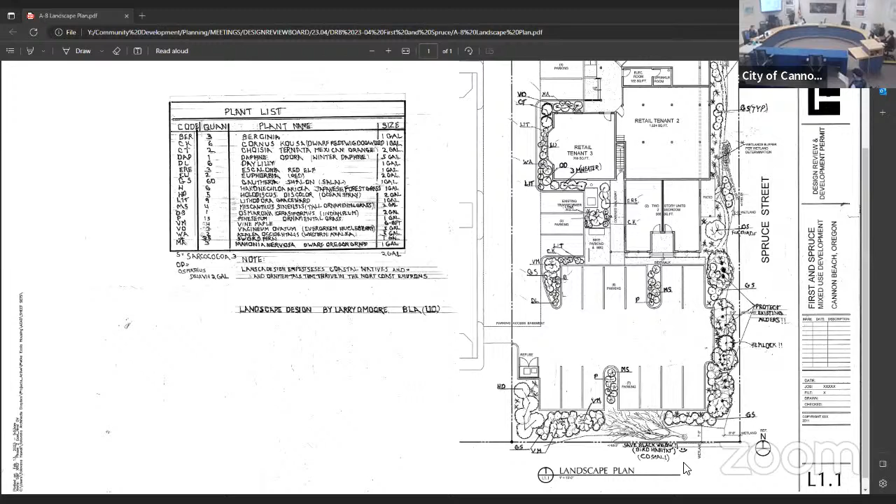May I ask a question? Of course.

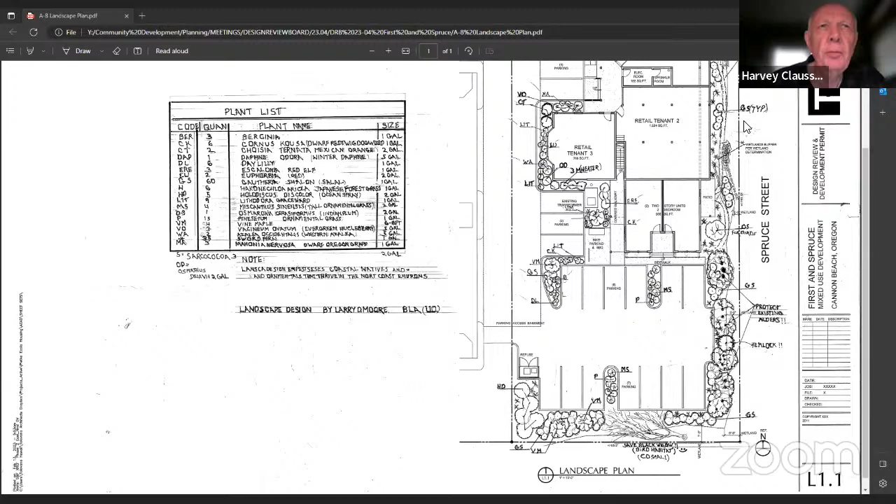Are we saying that Todd Prager Associates' plan for removal and retention of trees no longer applies, and that Larry Moore's landscape design is the current design presented with the application? That's my understanding, Harvey. So why do we even have Todd Prager's plan attached? That looked like a pretty good plan.

I can address that. This is a similar footprint project presented by the same applicant for the same property. We felt it was appropriate to recycle that plan for purposes of review. If there was a necessity to remove trees, we would go through the standard tree permitting process, which requires review by the city arborist before any permit to remove trees is issued.

Well, it certainly looks like you're going to have to remove a lot of trees. Would the applicant be willing, I mean, I thought Prager did a great job trying to retain trees. Would he be someone who could be involved again in making sure the trees are retained, or the ones that need to be removed, or is that up to the applicant or the city to determine who is part of that process?

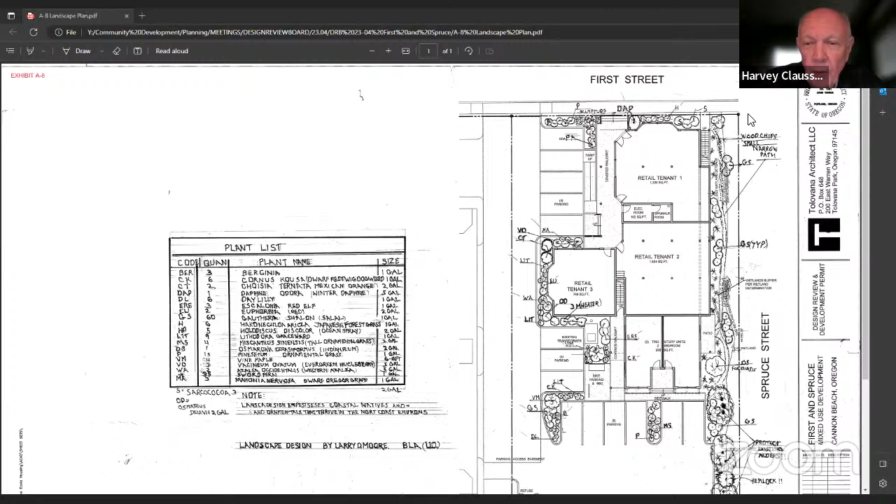I think that would be a question for the applicant. I would think we could make that arrangement, yes. It just, the former structure might have been the same footprint, but it can't possibly have covered the same area of the lot and be able to retain the trees that Prager was showing. Right, it's going to be impossible.

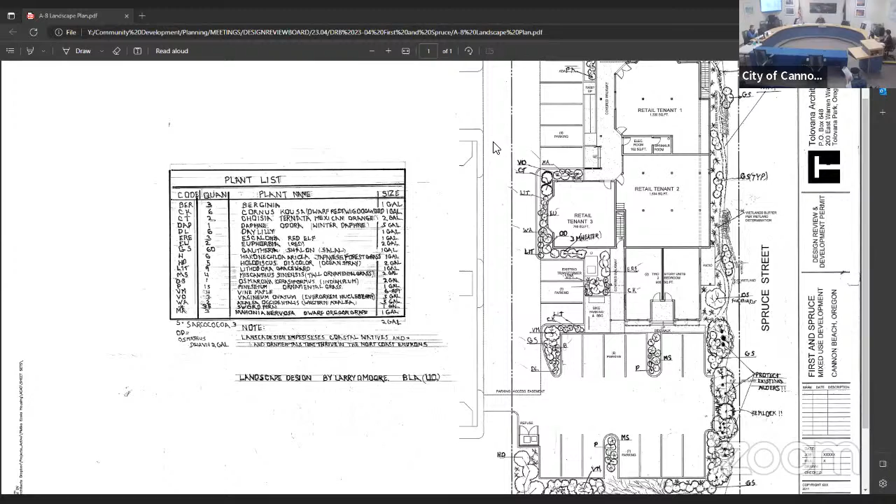I have a question about the parking. Is the number of spaces shown the minimum requirement for this building? Correct, that does meet the parking requirements. There is one parking space per 400 square feet of retail. And because the residential space is less than 50% of the building, there would be one parking space per residential unit instead of the required two.

The applicant does have off-site parking as well, so I believe one, possibly two spaces would be addressed through their off-site parking allocation. So there's not really any chance to eliminate parking spaces. Correct. Thank you.

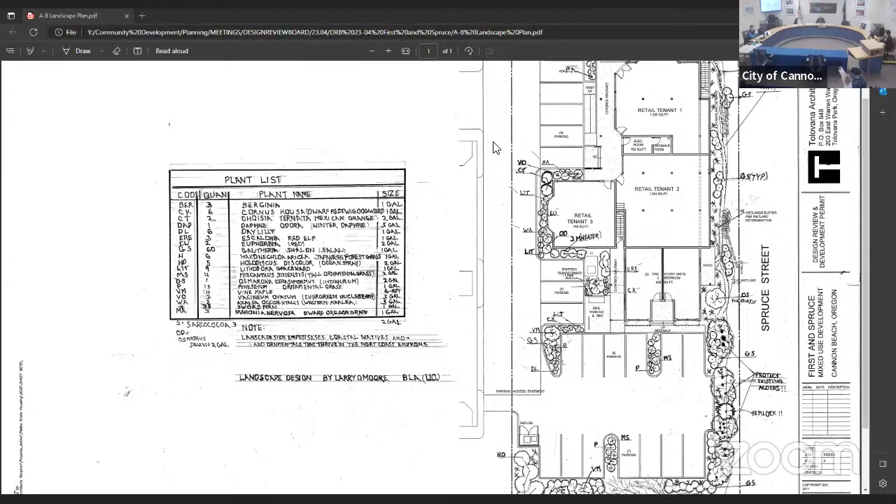Okay, so where are we at? Well, I have a question I'm confused about, regarding the fact that we are reviewing a C1 limited commercial zone, which according to section 17.22.050 standards, states the maximum building height is 24 feet, unless. But we've got 28 feet listed, and that's a C2 zone, so I'm confused.

To address that, it's 24 feet unless it has a peaked roof of 5:12 pitch or greater, in which case it can be 28 feet. Okay, and you can confirm that, David, that it is the pitch roof? Yes, absolutely, I designed it to exactly that criteria. Okay.

And then as far as freestanding signs, there's no plans for that. A lot of what you'd call malls have freestanding signs, but there's no plan to call it Ecola Square East or something similar to landmark it, and then the businesses can add their own business name?

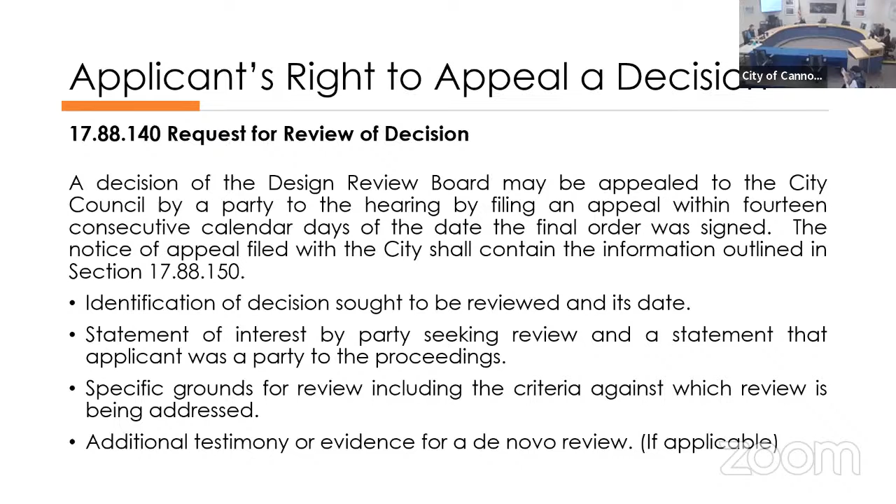This will discuss a little bit about the appeal and subsequent events. The city did appeal the decision made by the Design Review Board earlier this year, based on the provisions of 17.88.140, where a decision by the Design Review Board may be appealed to City Council by a party to the hearing by filing an appeal within 14 consecutive days of the date the final order was signed. The required information for an appeal includes identification of the decision, statement of interest, specific grounds for review, and additional testimony for review. The outcome of that appeal was that the City Council overturned the original decision of file DRB 23-01 and approved the plans submitted with that application.

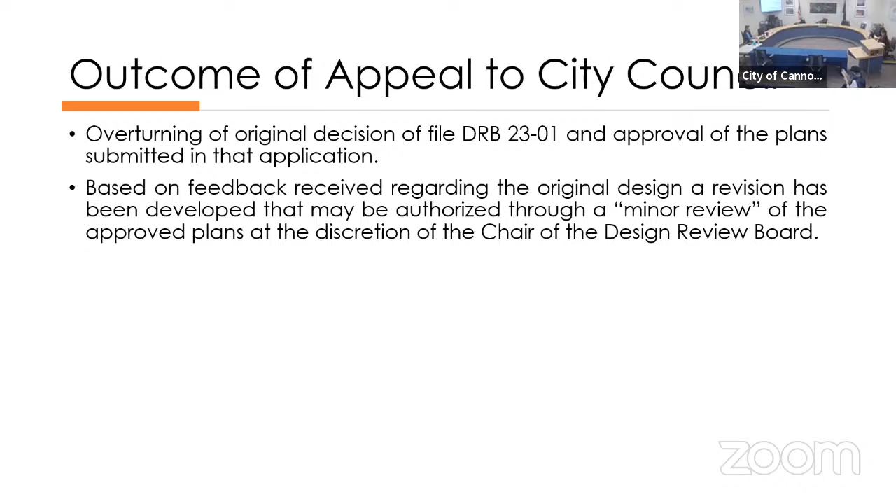Based on feedback received regarding the originally submitted design, a revision has been developed that may be authorized through a minor review of the approved plans at the discretion of the chair of the Design Review Board. A minor review is a revision of approved plans that includes construction documents and shall conform to all aspects of the approved design review plan where circumstances unknown or unforeseen at the time plans were approved make it undesirable or unfeasible to comply with some particular aspect of the approved plan.

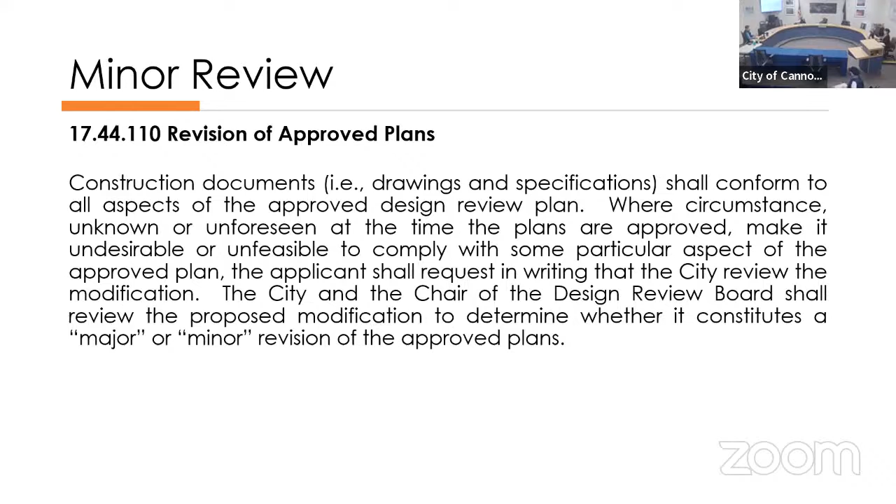The applicant shall request in writing that the city review the modification. Whoever is sitting in the chair of the Design Review Board shall review the proposed modification to determine whether it constitutes a major or minor revision of the approved plans.

Minor modifications are those which result in an insignificant change to the approved plan. Examples include limited dimensional or locational changes to building elements such as windows or doors, changes in building materials where only a limited area is affected, and substitution of landscape materials which do not affect the overall landscape design. If the city determines the proposed change is a minor modification, it will proceed with a review of construction documents or changes in construction.

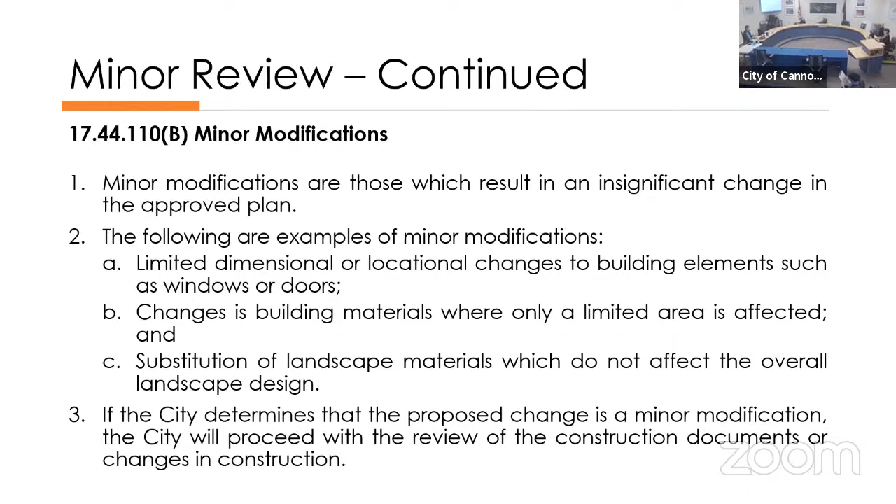This does include the addition of a new door on the eastern elevation of the structure. All other aspects would be unchanged. As the city council approved the original plans, the only change would be the addition of this door. The city has requested a minor review of this revision. We have requested that, which is why we're having this meeting tonight. It's our opinion that this is a minor revision because it's only the addition of a doorway, not a significant change.

As stated during the January meeting, the interior is not subject to review. The question is whether the footprint is the same as in the original design, total footprint? Correct, the footprint is the same. My understanding is they shrank and rearranged the bathroom configuration, shrinking the men's bathroom down a little bit in order to accommodate the family-friendly restroom.

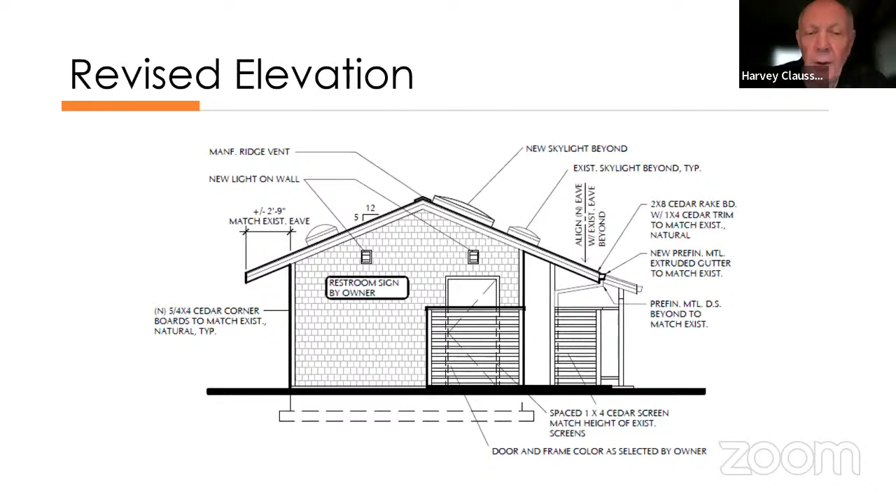At least they did insist on a family restroom. I think we gained quite a bit with that addition. I would agree. I don't know that Michelle was, but yeah, I agree too. I would note that they also added a foot washing station. Yes, yep. And there's a place to add lockers at some future date, should that happen or be considered practical.

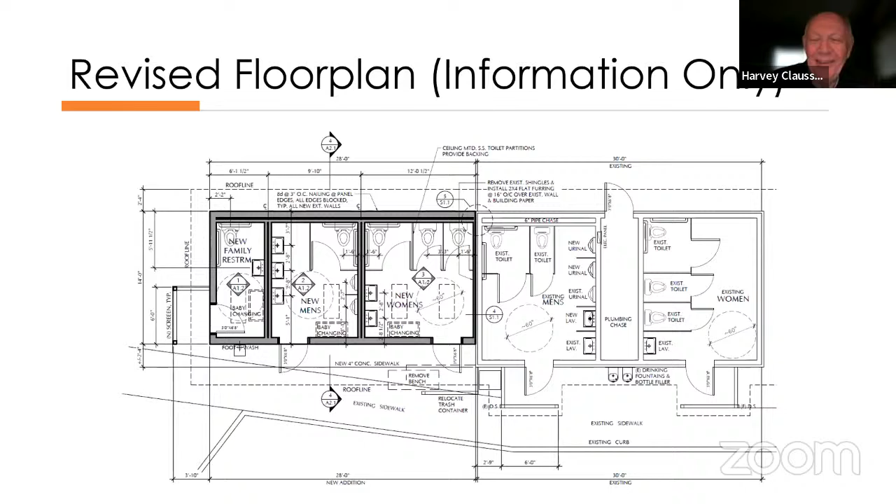Another thought for future handling is the idea of continuing something is far better than rejecting it. Had we continued it, we could have continued to be involved. Well, we learned something that night, that's for sure. Amen, chalk it up to being new. Yeah, and not being guided. Exactly.

So that's basically all I was going to cover: the request to go through the minor modification process for the addition of the door, and also just to cover the scope of what a minor modification is -- something like this, where it's a relatively minor change to already approved plans.

Lovely, I have nothing more to say about landscaping. Can you hold that? There's no recommendation to council that they require more landscaping?

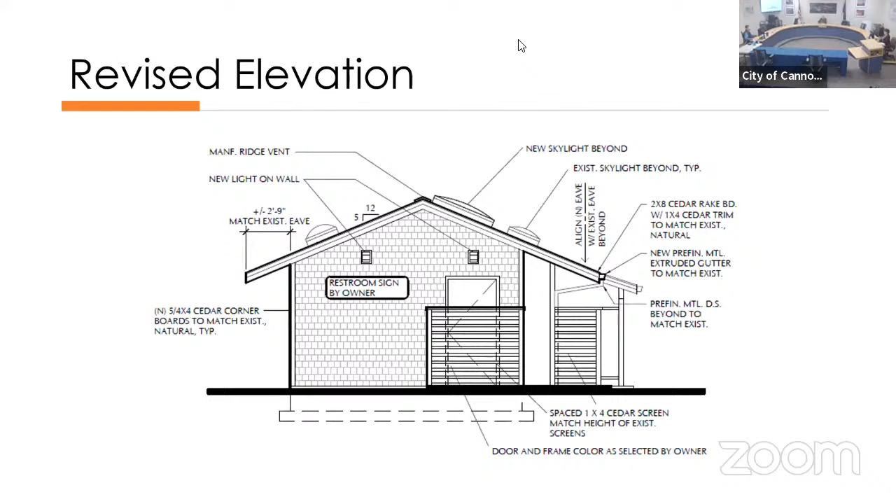It's recommended, but it has no official status. I just didn't know if, Chair, you could add that little note to your signing of approval that we'd still like to see some better landscaping.

I'm not sure I could even do that. Okay, all right, I could go to the city council meeting and explain. All right, okay, anything else on this topic?

Harvey: Nope, good of the order? Well, signs, I think we're gonna start discussing signs, and in particular, I know that we want to have all committee members present when we do start looking at the sign ordinance.

I am questioning the approval by staff of the sign for the psychic. So I've got a response to where you're going with this. I've also been talking to the property owner of that building, and I will tell you what I told them. We issued a sign permit. We did not go out there and tell the tenant you can put your sign here.

One of the things the property owner was asking about was apparently a small sign was affixed to the front of the building. Like I said, we don't go out and give permission for them to do that. Just because a permit's been issued does not mean they can overrule what their lease allows, or what the property owner is going to allow. So there is an aspect of this being handled between that individual and the property owner.